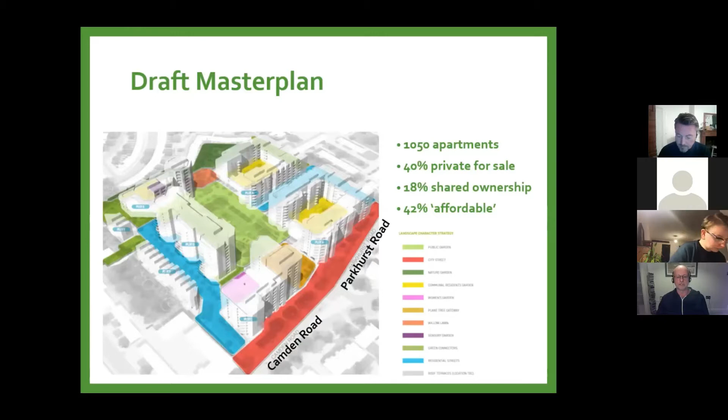Next slide, please. So this is the plan from a bird's eye view. You can see there is presently a two-way road across the site, which we're not sure is necessary, to be honest, but the next speaker, Jonathan Ward, will get to that.

The women's building is pointed out, but actually presently it's only one floor on the bottom of that building that is the women's building. Next slide, please.

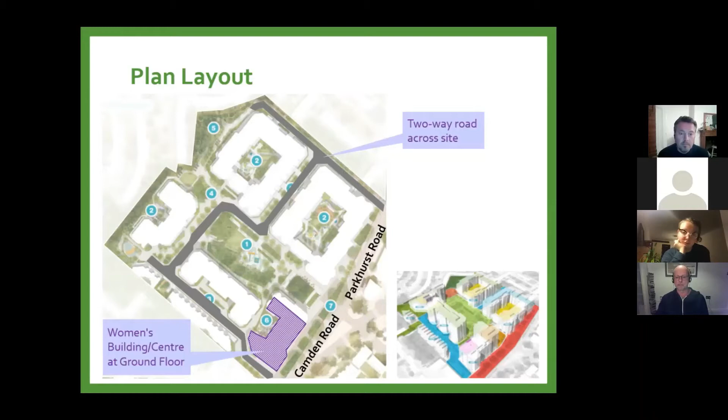And you can see here there are some quite tall buildings being put up—12 storeys, 10 storeys, 11 storeys. So there are going to be issues about the height of those buildings and what they do to the light and sun around the buildings, but others will cover that.

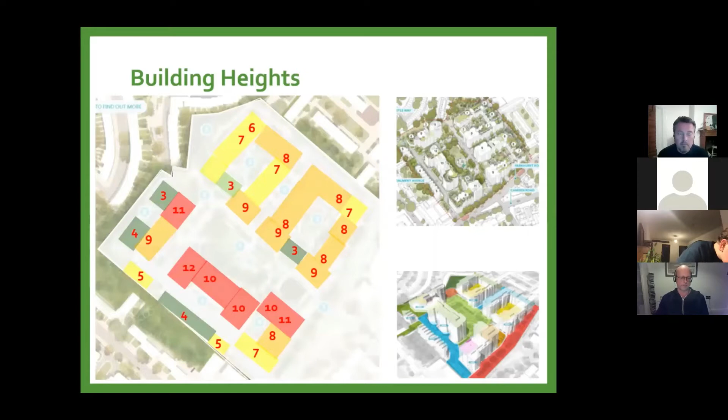They got 330 responses, which I know Peabody are pleased with, but when we did our own consultation a few years ago, we got well over 900 responses, and that was what we were really looking for. Also, when they were collecting responses, they didn't ask for any demographic data about age, gender, ethnicity, or disability, which would have been really useful. We really wanted them to do that, but they didn't.

The architecture and planning group sent a detailed review letter with 34 topics and areas of concern. We've recently had a general response from Peabody, but because they're going to come up with a new master plan, they've said most of the things we raised are addressed in the new master plan. Next slide, please. Next slide.

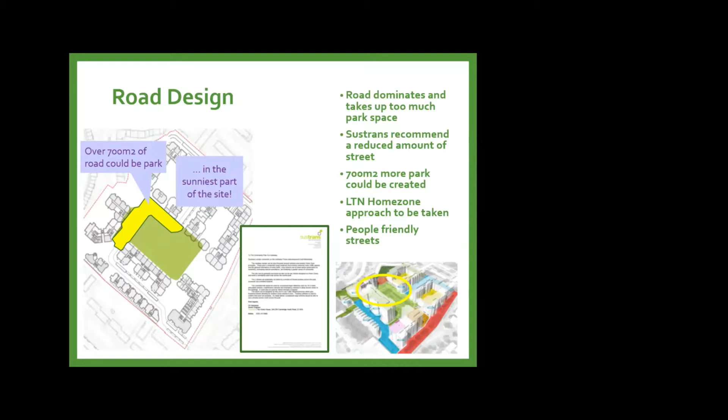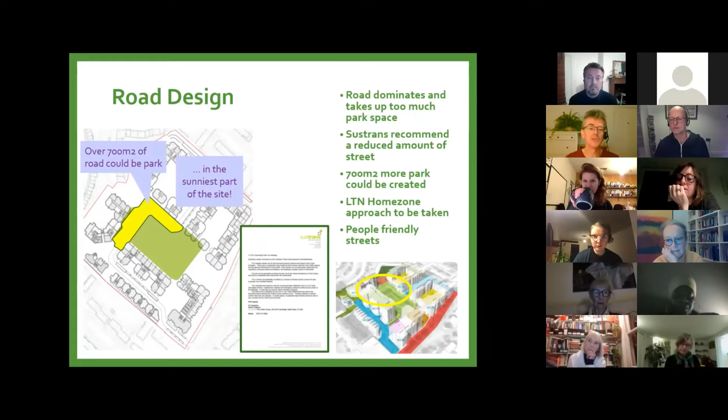The first issue is the site layout itself and the road design. As Will explained, there's a two-way road that cuts across the site, and we think this dominates and takes up too much space in the middle of the site, which is actually the park, and the sunniest part of the site. Without that two-way road crossing through, you could have another 700 square meters of park space—like a pretty decent, quite big five-a-side pitch. We're not suggesting an actual pitch, but that's the amount of extra space the park could have right in the heart of the site.

We consulted with Sustrans, an environmental transport charity, and they agree with us. They'd suggest a home zone or low traffic neighborhood approach—a couple of cul-de-sac streets rather than interlinking streets—with a design focused on shared surfaces and people-friendly streets. So we're pushing back on the overall layout of the site.

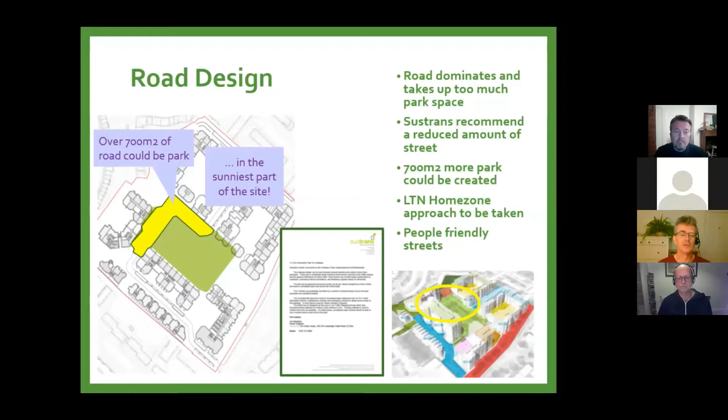Thank you, next slide. As Will explained, the heights of the buildings, particularly those shown in pink, on the south and west, also to the north of the central park, run between 10 and 12 stories high—over 30 meters—which creates really big shadows. This is an illustration of the central park on the 23rd of September at midday, showing the size of the shadow that will fall across the park.

As you can see, it's pretty dramatic, and this part of Islington is acknowledged to have a deficit of green open space. One of the planning aims for this project, according to Islington Council planning documents, is to deliver high quality green infrastructure—basically parks. So we're looking for a better design of the public spaces, which probably means lower buildings to allow more sunlight into these public spaces. Next slide, please.

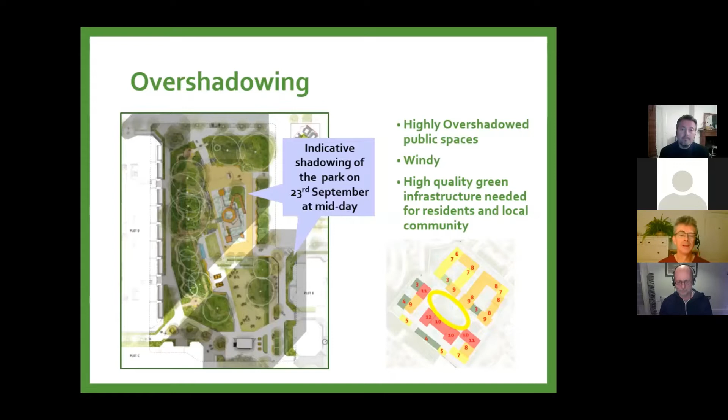There's also a concern that these are resident-only access, so while they form part of the green space, they're limited in who's actually allowed to use them. Next slide.

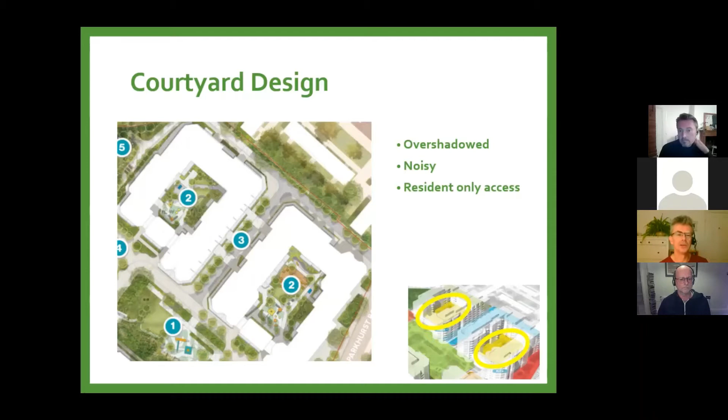On a similar vein, there's two specific garden areas identified that are very overshadowed. They're on the north side of buildings. There's an older person's accommodation and a garden on the north side, surrounded by buildings up to 11 stories high. And the women's building, which is really supposed to be a centerpiece for this site and an iconic building, is on the ground floor but to the north side of buildings between 7, 8, 11 and 10 stories high. This means both of these gardens will get very little sunlight, and they'll be windy due to downdrafts from a building that's 10 stories high. So we made comments about this.

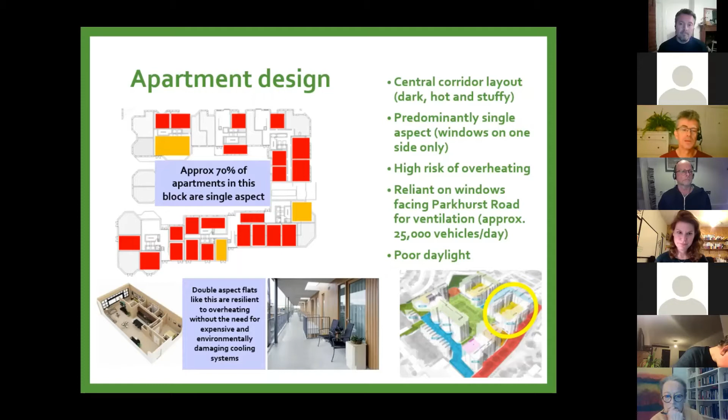Finally, the big omission in what we were shown in the draft master plan was really no sense of an environmental strategy. There was talk, use of the word sustainability, but nothing concrete about how those ideas will actually be delivered for the site. The council, Islington Council and the GLA, are targeting net zero carbon emissions by 2030 and are very keen that construction itself has very low carbon emissions, yet none of this was addressed in the draft master plan. The SPD, the planning document defining what we should get on this site, talks about achieving best practice sustainability standards.

A little bit later, Richard's going to be giving feedback from the Environment and Sustainability Group, so he'll talk more about this, and I'll hand back to Rod, I think.

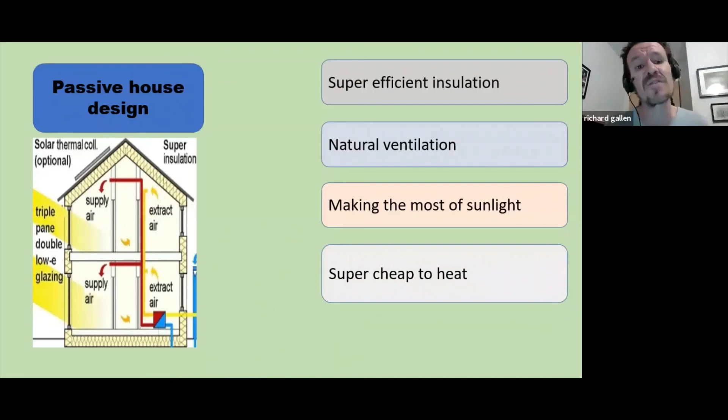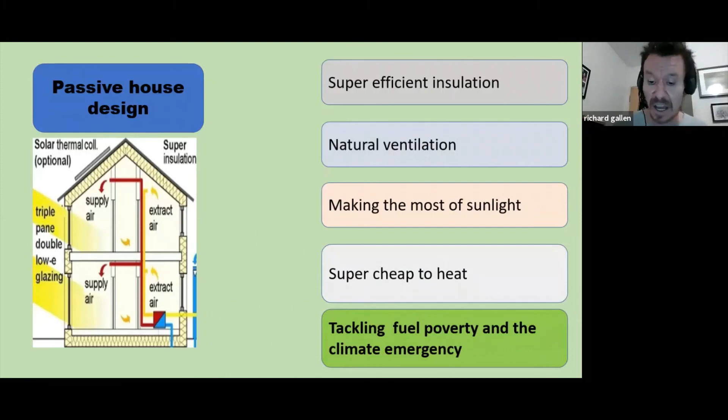Peabody say it's too expensive to build passive house design, that we don't have the money. But in the long term, for the residents, it works out massively cheaper to heat the house using passive house design. This is cutting edge, but it's being done - for example, Agar Grove is the largest passive house development in the UK, with up to 500 homes built to passive house standards, passive house accredited.

And where is this taking place? It's taking place in Camden - Camden Council are doing this, just right next door to us. Peabody say they want to adopt passive house principles, whatever that means, and that the development will decarbonize over time as the UK relies less on fossil fuels. So what they're basically saying is business as usual - we're not going to expend anything extra on ultra high energy efficiency standards, we're going to wait for the energy supplies to decarbonize for us.

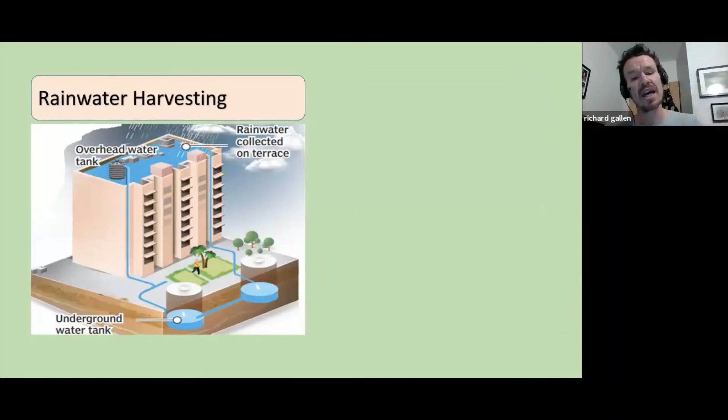Sustainability is another really important issue people are concerned about based on the consultations. Rainwater harvesting is something else we're pushing for - rainwater is collected on the roofs and stored in underground tanks, then used to water the 9,000 square meters of space on the site. This green space is about creating community gardens and wildlife areas.

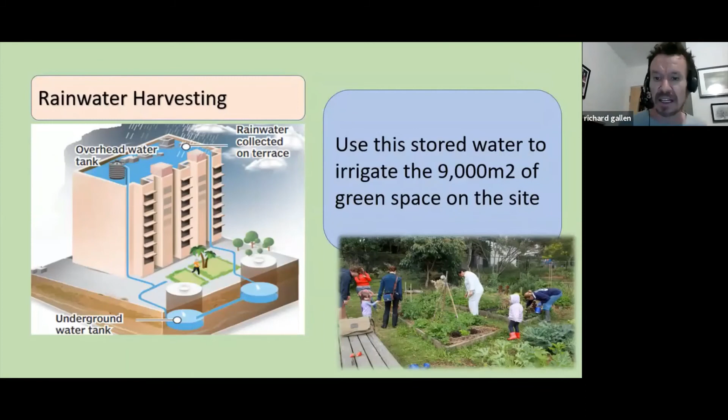We want the green spaces to be community focuses rather than lawns that become sort of dog toilets, like you see in a lot of housing estates, unfortunately, around Islington.

So trees - as we all know, trees capture CO2 and filter out air pollution, in one of the most polluted parts of Islington, next to a road that has 25,000 cars a day. There's 30 mature trees on site and we want to protect all 30 of them. Peabody have yet to get back to us on whether we will be able to do that, and it's unlikely that's within their plans.

We also want the council to set an example so we can create wildlife corridors in the back garden, so we can have hedgehogs and wildlife moving through the complexity of gardens and green spaces through Islington, one of the most built up boroughs, and the most built up borough in the UK.

And finally, of course, sustainable travel. So we want connection to the cycle routes on Parkhurst Road and Camden Road, cycle routes through the site to all the surrounding areas, making it easier for residents to cycle and walk. We've seen quite a lot now since the lockdowns - a greater diversity of people cycling, not just your sort of middle-aged white males on bikes. You see a much greater range of people cycling, and we'd really like a development that encouraged this type of transportation, and of course parking for accessible vehicles only. So that's environment and sustainability.

If you're interested, we have a working group that meets regularly. We're hooking up with the architecture and planning group because a lot of what we do overlaps. So yeah, get in touch.